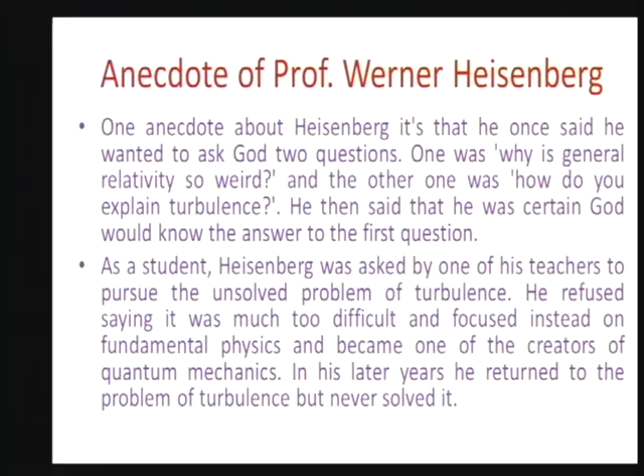But in reality, you find that there is a significant drag, and there is also some oscillating lift. How do these things happen? These kinds of things were perplexing people quite a bit, even as early as the beginning of the 20th century.

It is credited to Ludwig Prandtl. He was doing some experiments in a duct and found that the flow was separating. He visualized it and thought that the layer close to the wall was the one giving problems, so he applied some suction. Once suction was applied, the flow behaved properly. So it was then clear that a thin boundary layer close to the wall was giving the problem, and this thin boundary layer is because of the small viscosity of air.

In fact, we know that for any bluff object, even our automobiles and anything else which is not streamline shaped, large drag comes because of the small viscosity. This gave birth to a new subject called asymptotic theory, or singular perturbation theory, where it was shown that small things need not have small effects, they can have large effects as well. So if you take care of the boundary layer, it is possible to reduce the drag and even improve fuel efficiency for cars and so on.

One more perplexing question: we tend to think that if geometry is symmetric and the incoming flow is symmetric, then the outflow also should be symmetric, but that is not the case. Many times we find it is asymmetric about the mid-plane, with vortices being shed. So symmetry of the geometry and boundary conditions does not guarantee that the final solution will be symmetric. This is again another perplexing thing about fluid mechanics.

Not only that, we generally tend to think that if you have a steady input, the solution will be steady. No - for example, here uniform flow is approaching a cylinder, external flow over a cylinder, and although the incoming flow is steady, the outgoing flow may not be steady. It will be oscillating with a specific frequency. So how do these things happen?

Of course, experimentally we see this, and mathematics also explains it in terms of instabilities and so on, but still the mind finds it difficult to accept why, when everything in the input is symmetric, the output is asymmetric and unsteady.

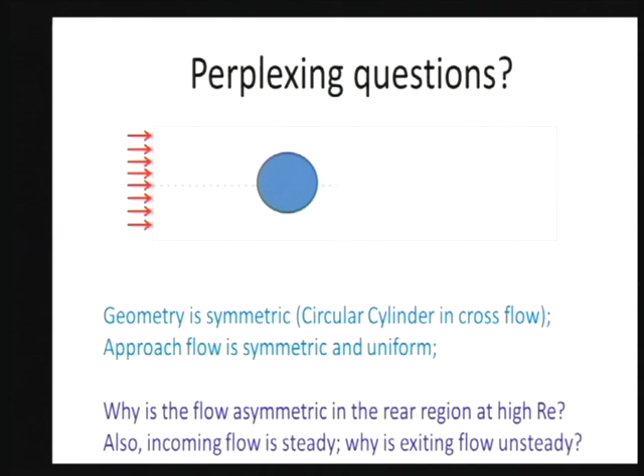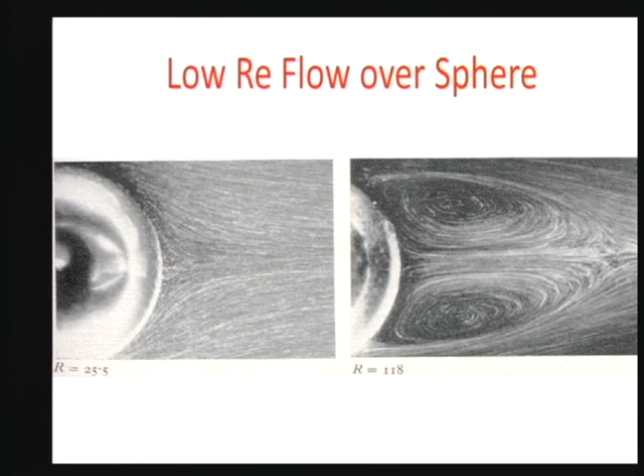So small effects - viscosity being very small - can still play a big role.

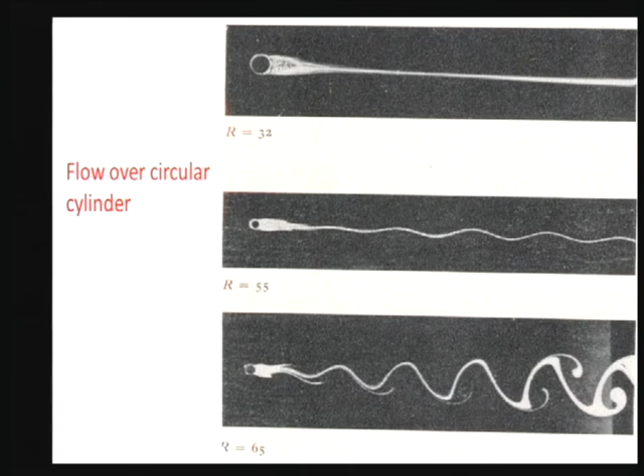This is flow over a cylinder. At very low Reynolds number, we see steady flow with steady streamlines. As you increase the Reynolds number, unsteadiness begins in the wake, and then finally it swims up to the boundary layer of the cylinder itself, where unsteadiness starts. We get what is called a Karman vortex street, forming an asymmetric flow pattern about the mid-plane.

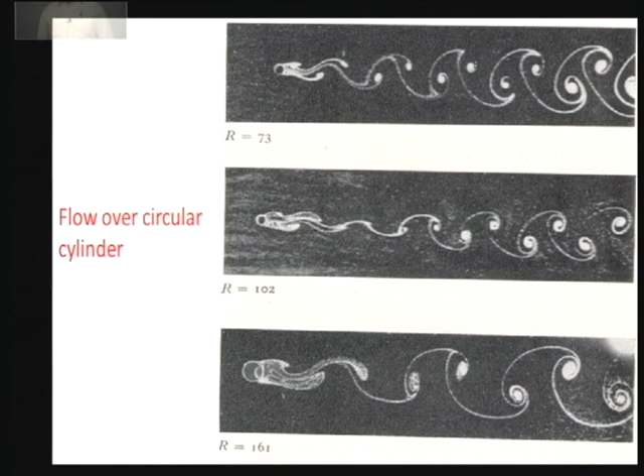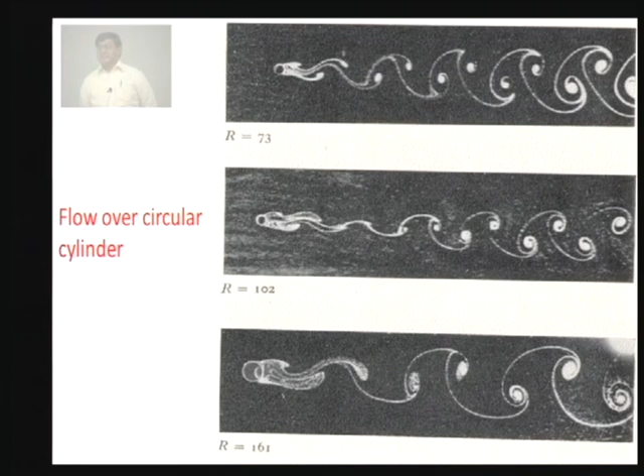If this continues as you increase the Reynolds number even further, initially this may be predictable, with only a few frequencies present - even a single frequency, and later a few more frequencies come into the picture. But if you go further, the whole thing becomes random and unsteady, with random fluctuations coming into play. That is the hallmark of turbulence: in fully developed turbulence, you cannot determine everything - it becomes more like random behavior, with random fluctuations in velocity, pressure, and so on.

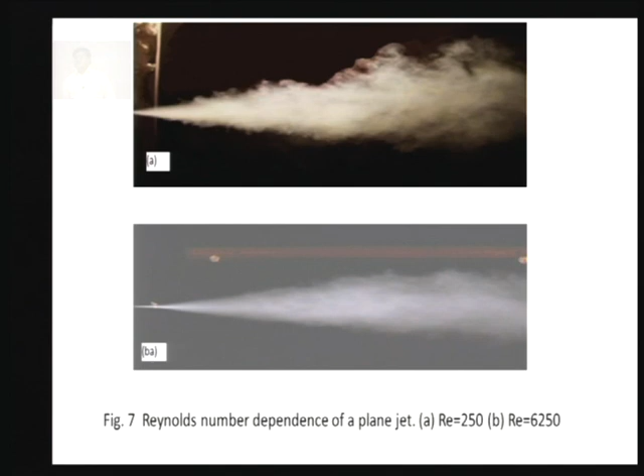Once it becomes turbulent, you can't predict it completely. Of course, now we have what is called direct numerical simulation, and with very powerful computers one can attempt it, but even then there are limitations, and you don't understand everything completely.

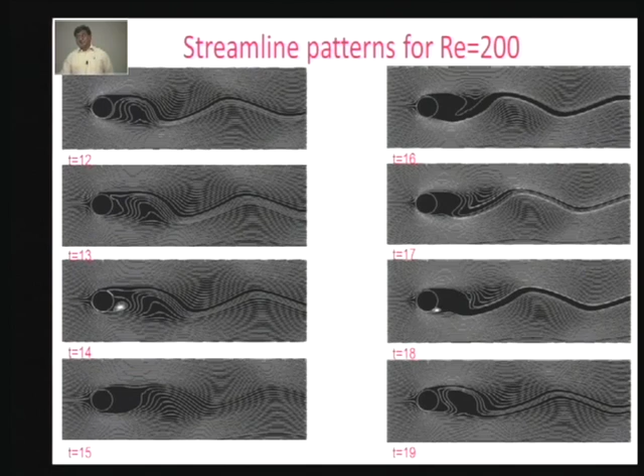So we see that the streamline patterns at some Reynolds number show oscillatory solutions. These are some of the solutions that our students have generated. Next, this is in fact the predictions that we did, which we compared with results available in literature.

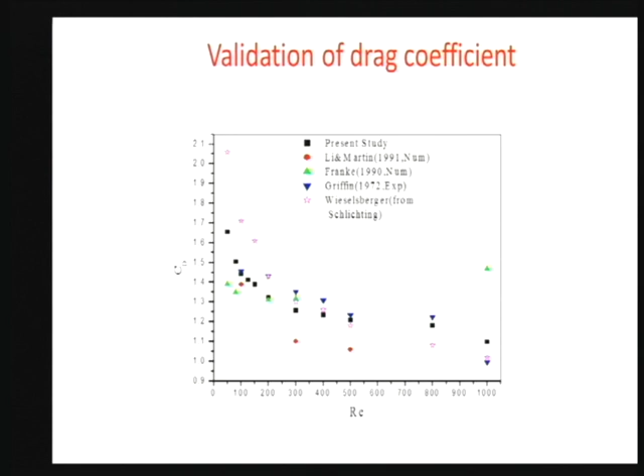What we have shown are literature results, most of them experimental. Please see one important characteristic: at low Reynolds numbers, the scatter is very high in experimental work, not in theory. Why would that happen? The reason is that flow separation and vortex shedding depend on small surface asperities from machining. Those asperities determine at what Reynolds number flow separation and unsteadiness will occur. So from one experiment to another, the roughness could be slightly different, and these things matter a lot.

So we come back to the theme again. Next, this is the Strouhal number. If you non-dimensionalize the oscillation frequency, you form a non-dimensional number known as the Strouhal number, and predictions are reasonably okay. But even here, at lower Reynolds number, the scatter is somewhat higher.

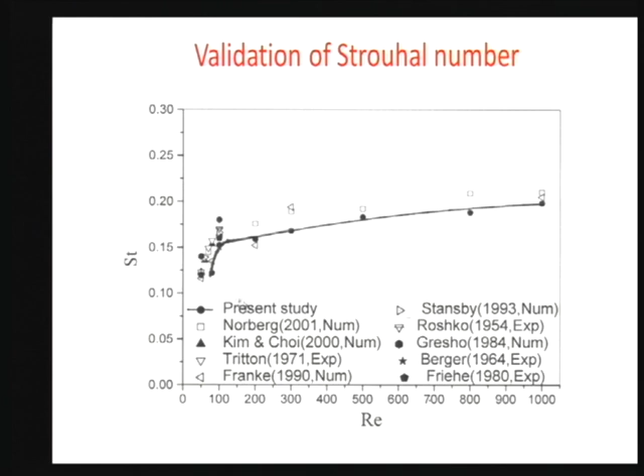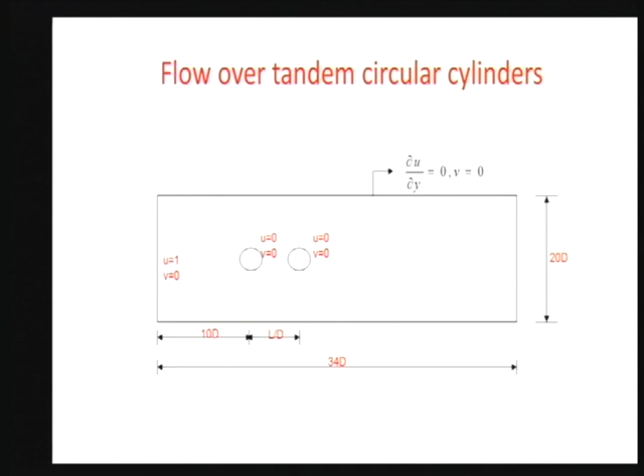Next, we did some work with tandem cylinders, two cylinders, one placed behind the other, or one placed by the side of the other. A lot of interesting phenomena took place. Depending on the distance between the cylinders, you can suppress vortex shedding completely, or it may exist if they're separated further apart. If placed side by side, you can have coupling between the vortex shedding, called in-phase or out-of-phase coupling. When two cylinders are there, they can shed vortices in tandem, synchronously, or asynchronously, out of phase.

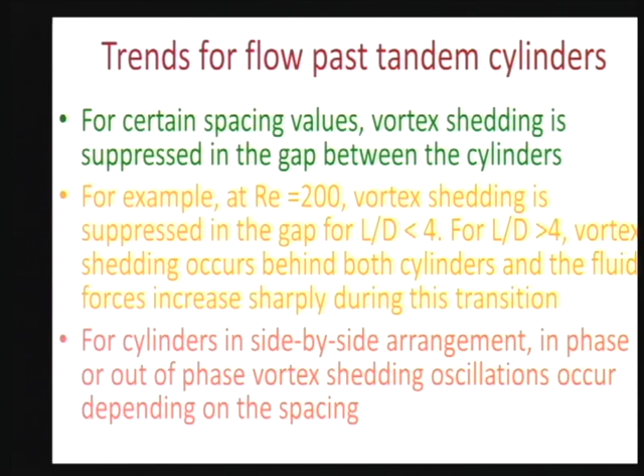Next, so that's what it says, that vortex shedding can be suppressed, or it can be in-phase and out-of-phase shedding, and so on.

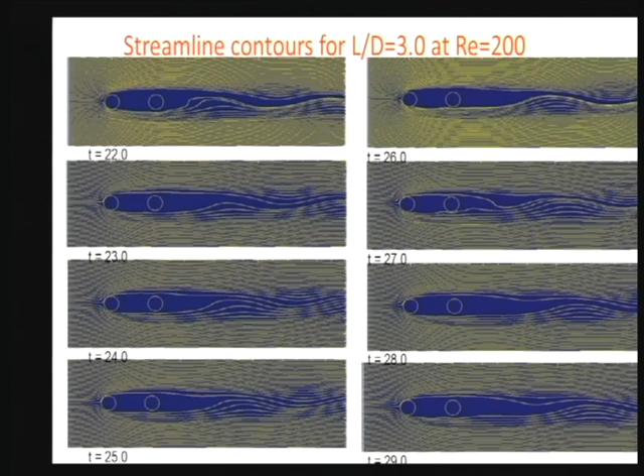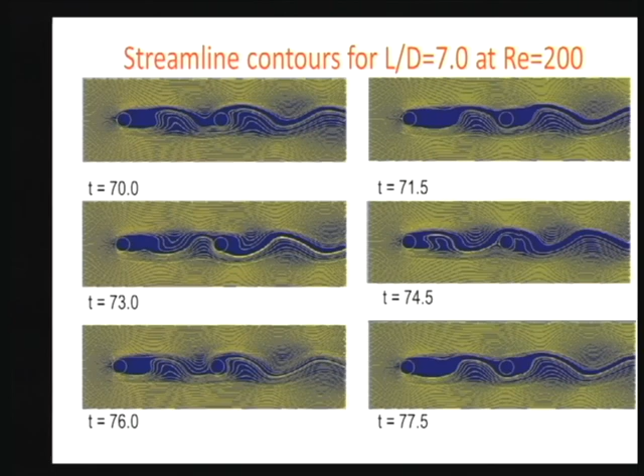Next, this is two cylinders, one behind the other. For this aspect ratio, with a spacing of 3, vortex shedding is completely suppressed in the space between the cylinders, but behind the rear cylinder there is still wake oscillation. Next, if the spacing is increased to about L by D of 7, you see vortex shedding behind the first cylinder also. So a lot of interesting phenomena take place.

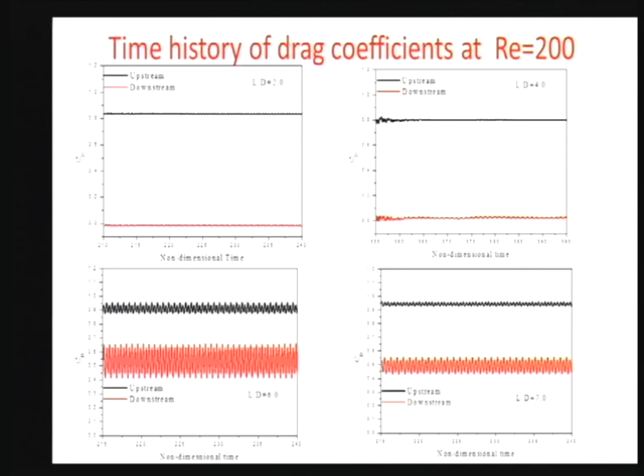Next, this is where we compared with literature data, and oscillations can be seen, especially at higher separations.

This shows two square cylinders placed side by side. In this sidewise separation, we see in-phase shedding, where the top and bottom cylinders shed more or less in phase. In the next case, with increased spacing, you see them shedding out of phase. So in-phase or out-of-phase shedding is possible depending on the spacing.

If you think of applications, consider high speed jets, especially supersonic jets, which make a lot of noise because of shocks. Those shock cells emanate large amounts of acoustic radiation, with noise levels perhaps 120, 130, or even 150 dB, which can be injurious to hearing. One way of reducing the noise is to put another jet. With two jets, for certain spacings, the noise can cancel off if made out of phase, meaning two jets can make less noise than one jet.

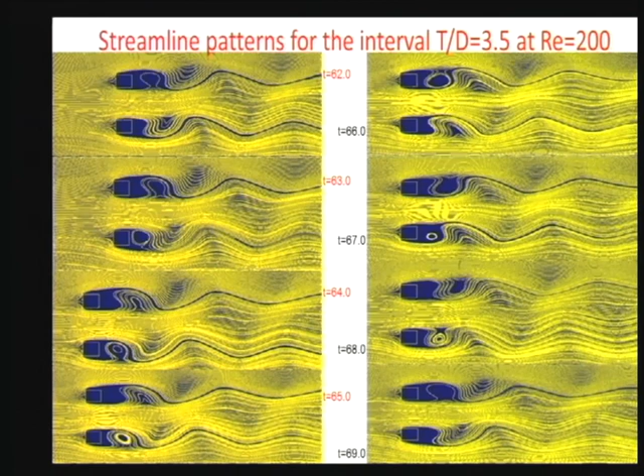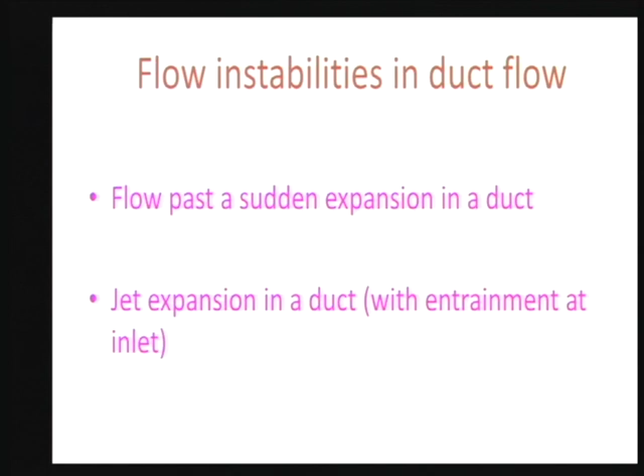Of course, the earlier examples we showed were external flows. Even in internal flows, some interesting phenomena take place. This is flow past a sudden expansion in a duct. Just the geometry is shown, where in the bottom picture we have allowed some entrainment of air, while the one above has only one jet coming into the sudden expansion.

This gives rise to what is known as the Coanda effect, where a jet coming into a sudden expansion can attach itself to the top wall or the bottom wall, and both modes are possible. At a particular time, which way will it go, top or bottom? It's a matter of randomness, or as I said, the smallest disturbances can lead one way or the other.

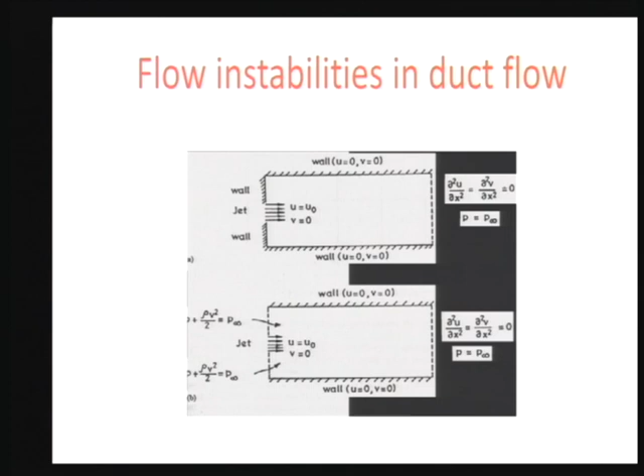But mathematically, both modes are equally probable.

So here we have predicted this jet expansion in a duct at different aspect ratios for the same Reynolds number of 200, with aspect ratio alone varied. We see that at very low aspect ratios it remains attached as a symmetric jet, spreading symmetrically.

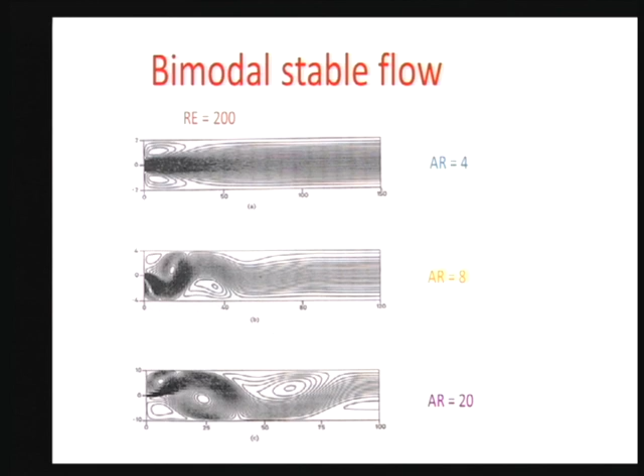As you go to higher aspect ratios, it attaches to one wall or the other. In fact, for the same aspect ratio and same Reynolds number, sometimes the jet attaches to the top wall, sometimes to the bottom wall. Experiment has also shown this, and theory shows that either way is possible. It depends upon the initial conditions you start with.

At still higher aspect ratios and higher Reynolds numbers, the jet oscillates like a flag. It's a transient instability, not attaching itself to any one wall permanently, but oscillating like a flag. This sort of oscillation is also possible.

Something that has really perplexed me: we've shown for internal flow, and also for external flow, that if you think of flow over a cylinder, initially it is symmetric flow. Then flow separation takes place, which is again symmetric, followed by unsteady shedding, which is asymmetric. A similar kind of thing we have seen here for internal flow.

Initially the jet spreads symmetrically. Then it starts attaching itself at steady state to the top wall or the bottom wall. Then at still higher Reynolds numbers, it starts oscillating as a function of time. So there seems to be a hierarchy of these instabilities: first a symmetric steady one, then a transient one, and so on.

In flow over a cylinder there are many other things too. My friend Professor Sanjay Mittal from IIT Kanpur has looked at vortex shedding behind a cylinder in great detail, and he finds many transitions—sometimes from 2D it becomes 3D, and so on. Three-dimensional effects come into the picture.

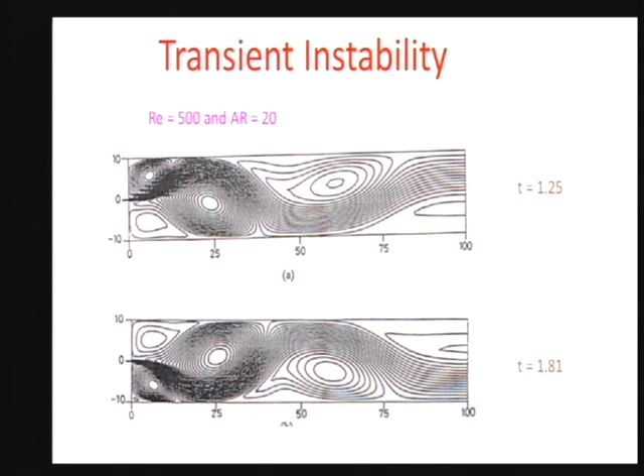And of course, why do these things happen? Again, the reasons are not known in so much detail. Mathematics will tell you that this is possible, but the mind finds it very difficult to accept. That was the reason I mentioned this confounding fluid mechanics, fluid dynamics—there are many things which are still perplexing.

We have seen that if you allow entrainment to take place in the duct flow, that changes the picture completely. Even at high Reynolds numbers, it tends to be steady, and slow oscillations come in only at very high aspect ratios, like a flag oscillating. So with and without entrainment, the picture is very different.

Now one may ask, where do these things have application? Many times in aircraft combustors and so on—from a small duct, the combustor may be a sudden expansion, and there will be recirculation patterns in corners, which can be steady or unsteady, and that can have a big effect on the stability of the flame inside the combustor.

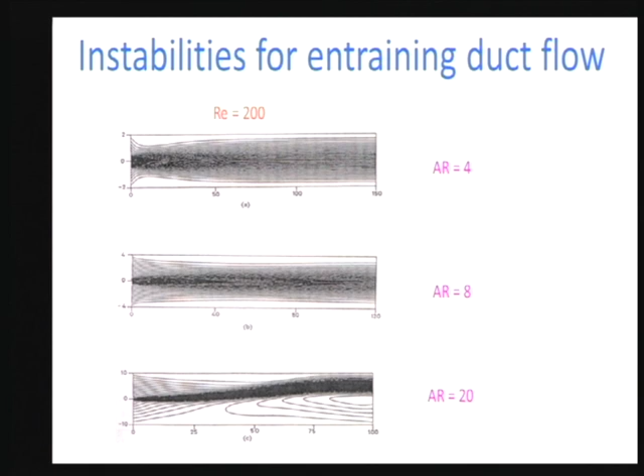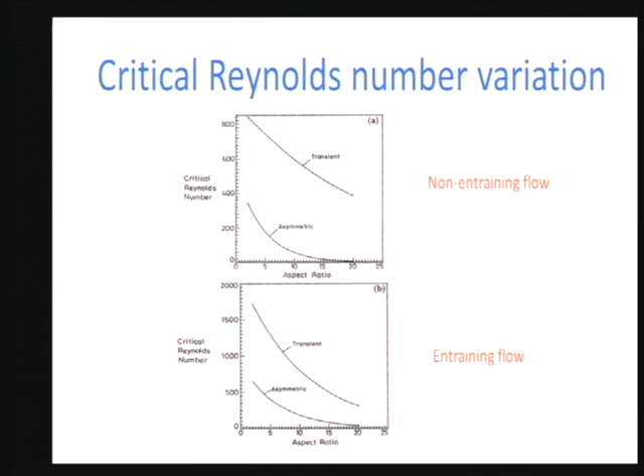This shows the critical Reynolds number as a function of aspect ratio for the steady case and for the transient one, for entraining flow and for non-entraining flow, etc. So sudden expansion across a duct—internal flow in general—also has a lot of such interesting features.

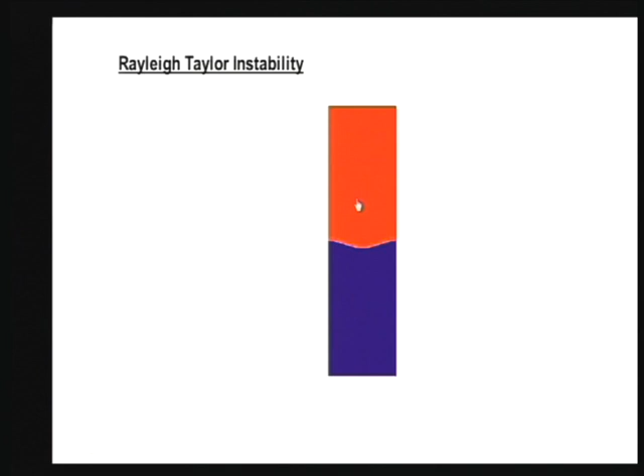Where there are density differences between fluids, finger-like growth is possible. This is a numerical prediction, which we compared with somebody else's prediction. These involve multi-phase flow modeling.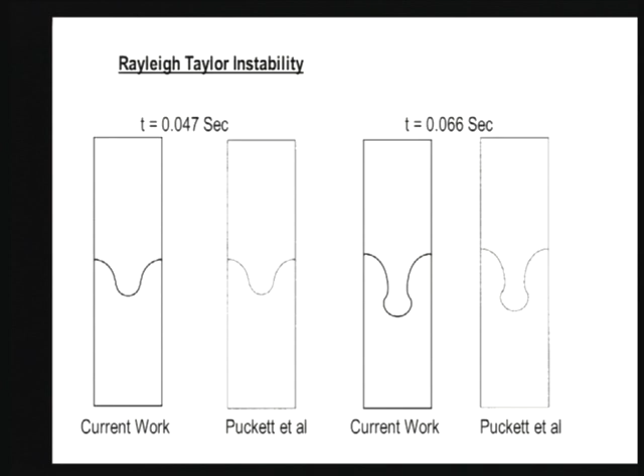So here we see the growth of a finger-like structure.

This is a very interesting effect. In fact, the reason has been found only recently, from micro-nano technology. The great philosopher Adi Shankara has said something about this, in philosophy.

He says, 'Nalini dala gata jalam atitaralam, tatu jivitam atishaya chapalam'—that is, water that has fallen on a lotus leaf, how unstable it is; life is also very uncertain. That's what he says. In both Hindu and Buddhist scriptures, the lotus leaf has been compared as a symbol of purity, because although it sits in dirty water, the water doesn't soak it. It's clean of dirt as well as water, and also carries a sense of detachment from samsara, etc.

So it has been quoted quite a bit in the scriptures. And if you look at the reason why this is happening, on lotus leaf there are a lot of micro scale projections, and on top of them nanoscale projections.

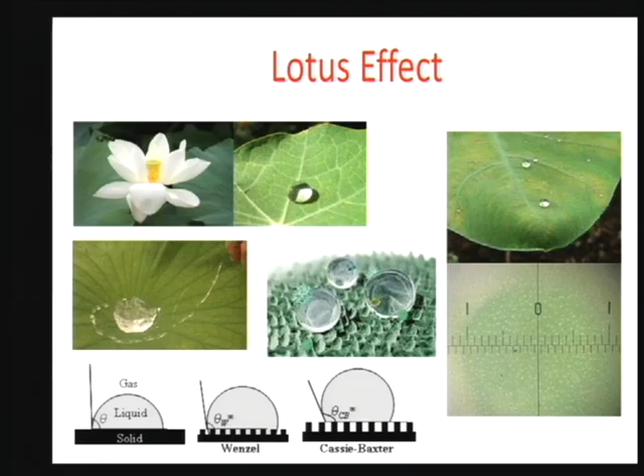These nanoscale projections, for example in the bottom picture you see here, trap a layer of air between them, and that functions like a cushion. Because of this, the contact angle can be greater than 150 degrees or more, in which case it doesn't wet the surface.

So non-wettability is a characteristic of the lotus leaf. Water or even honey, which is placed, will not wet it at all. And now we can produce surfaces having these projections at micro and nano scale.

It is possible to produce them, and so they will be highly non-wettable. For example, gloves used for dealing with dirt, if you have this kind of surface, it won't wet at all, and the dirt will not stick. So it's possible to use this for several applications, and even to generate such surfaces with micro and nano scale projections.

Next, this is Rayleigh-Bénard convection. If there is a temperature differential, let's say in a layer, that can create natural convection, especially if the Rayleigh number characterizing the problem is greater than the critical value.

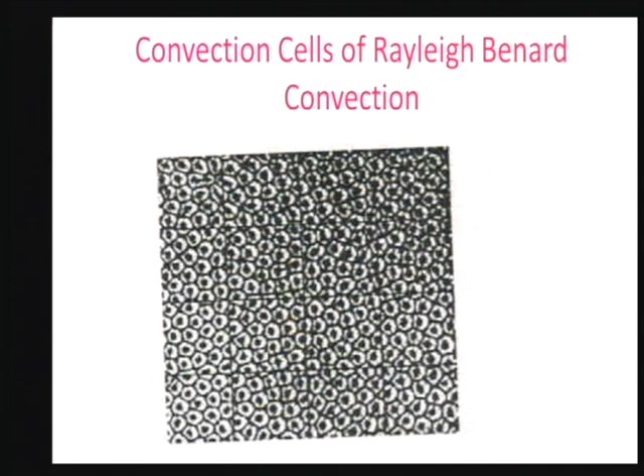Next, we have looked at two-layer Rayleigh-Bénard convection. There are two fluids and a temperature differential, and with this a lot of interesting phenomena take place. We have steady convection in both layers, or convection in one layer driving the other.

That is, the bottom layer alone can have convection, while the other is mechanically coupled, not thermally. So one layer has already reached the critical state and is having natural convection, while the other has not reached the critical state but can still have convection inside that layer mechanically.

Or this can have oscillatory kind of convection as well, where convection occurs in the bottom layer, then the top, then again the bottom, again the top, and so on. Stationary or standing wave type of convection is possible.

You can also have what is called traveling wave convection, where the convective rolls move up and down. So all kinds of phenomena have been seen between two layers depending on the temperature differential, the properties of these layers, the density ratio, the viscosity ratio, the conductivity ratio, etc. Depending on this, many things are possible.

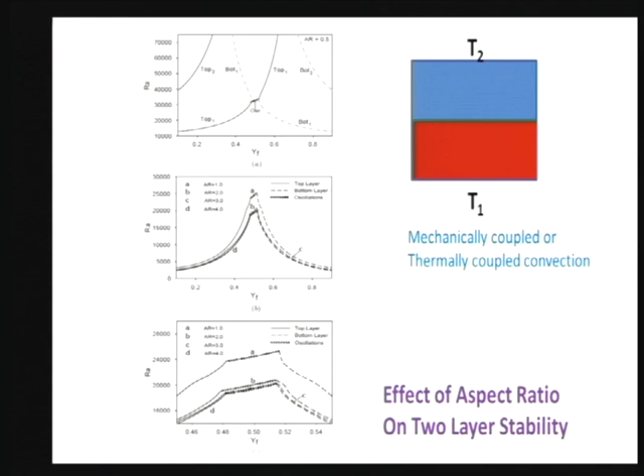For example, if you take the middle graph, the left side shows the bottom layer being the driving layer, and the right shows the top layer as the driving layer. In between is an oscillatory regime where top and bottom can alternately drive each other, either as a standing wave mode or a traveling wave mode.

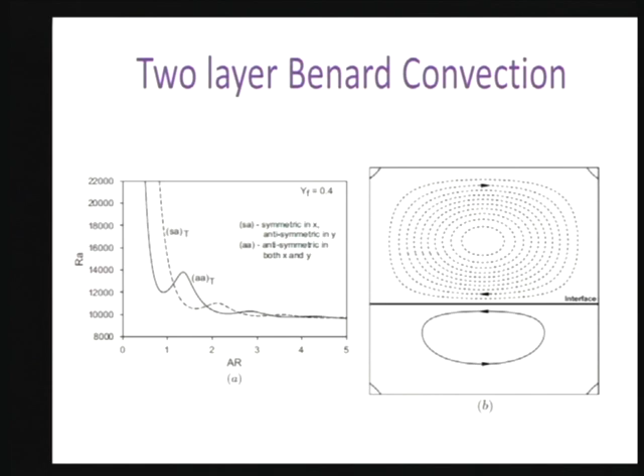Next, they show some of the pictures here, with one layer being dominant over the other. I think here the top layer is the dominant one.

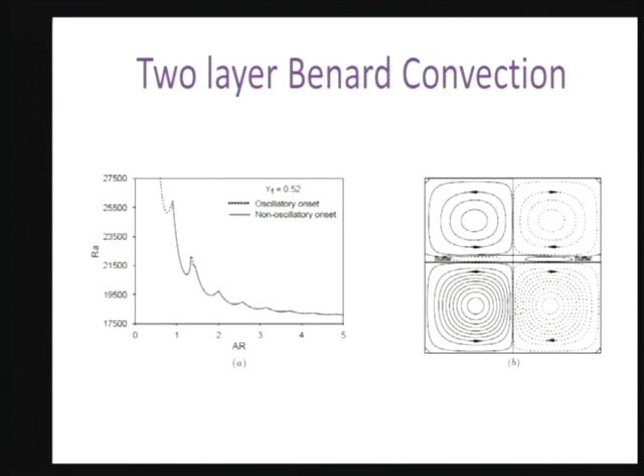Here they are almost equal, and this is, I think, standing wave mode. Let's move quickly through these. You see, for example, the standing wave pattern is possible.

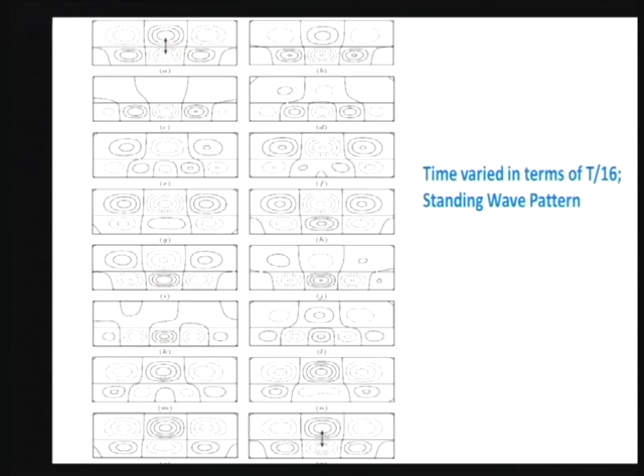As a function of time, we have shown some lines as solid and some as dotted. The solid and dotted lines represent the sense of convection, either clockwise or anti-clockwise, and this switches as a function of time. So a standing wave pattern is possible, and a traveling wave pattern is also possible.

I come to the end of the lecture. I have shared with you some of the confusions I have had, that fluid mechanics abounds in such things, that a small cause need not have a small effect, it can have a large effect. A steady input, symmetric geometry, the solution need not be symmetric, it may be asymmetric, it may be vortex shedding, it may be transient, and so on. Even the example of the lotus leaf shows that small projections make the phenomena so different that water does not even stick, or dirt does not even stick.

It is a very exciting subject. You have great experts who are going to interact with you over the next few months, and I'm sure this will be a great success. Let me wish the effort all success. Thank you.

Is there any questions? I would be more than happy to answer. I guess I have confused everybody. Thank you.